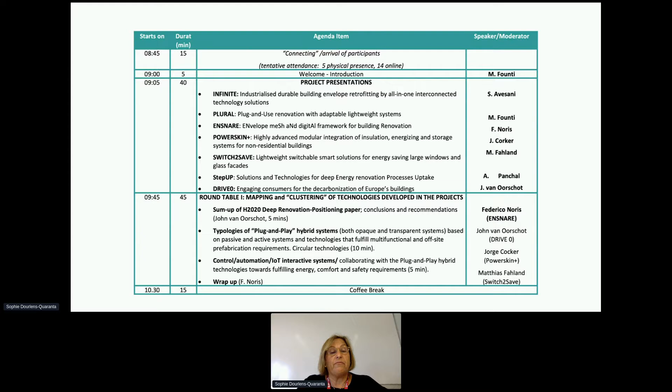The coffee break will follow, and the workshop will close with the second round table that will try to define KPIs, and whether we could, via these KPIs, harmonize the technologies and represent the prefab systems.

So the first presentation will be the Infinite project and will be done by Stefano Avesani, who is not here but will be remote connected.

Okay, Stefano, could you please go on? Okay, so I have to. Yeah, just a moment. So he's online, huh? Yes. Just a moment. So Stefano, please click on share my audio and video.

Do you hear me? Good morning, everyone. Yes. Good morning. Yes, we do hear you. Perfect. So thank you. Thanks for organizing this also in hybrid mode.

I'm happy to share with you the Infinite project status. So as far as I understand, you will share the slide, right? Okay, just a moment. Of course. Yeah, just full screen. Okay.

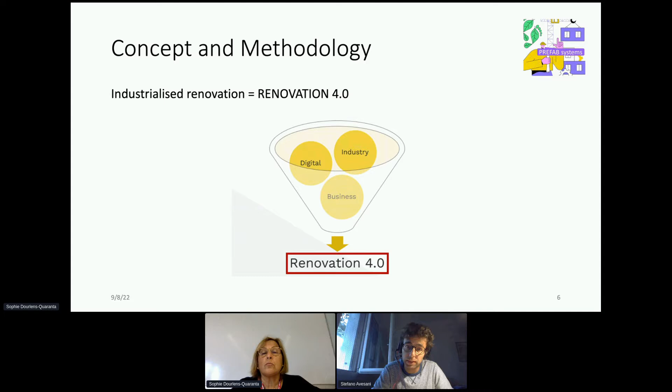And what we propose basically is this, we have called it the renovation 4.0, so merging the topic of industry 4.0, so full industrialized solution supported by digitalization and sound business model. Next slide, please.

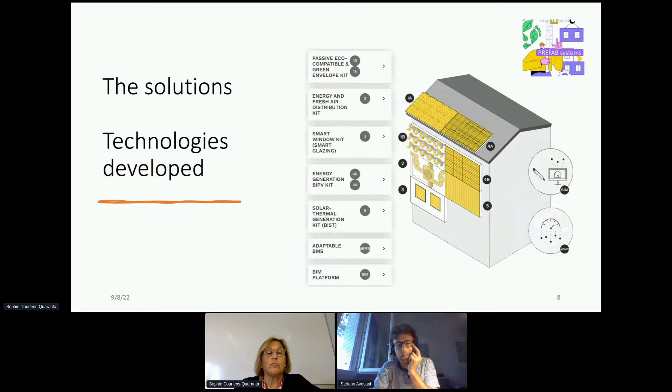In the next slide, actually, you see the concept of having also gray water treatment integrated and a bioelectrochemical system to generate electricity for sensors to be integrated in the envelope.

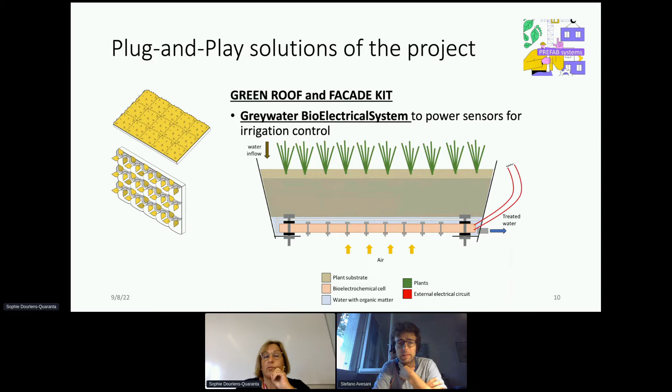The next slides, we go to the second kit, which is basically integrating a semi-decentralized mechanical ventilation unit, but with the plug-in of heating and cooling. So basically, the idea is to distribute heating and emit heating and cooling through this kind of machine. So a very compact heating and cooling system, all integrated in the facade.

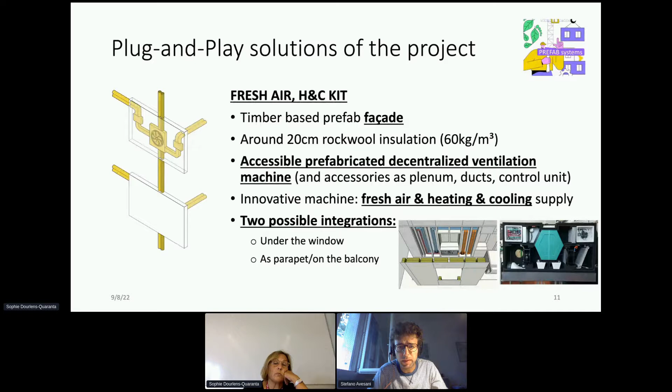In the next slide, you can see our development in terms of smart window. We are focusing on two aspects. One is the sense bar, and this is the second generation of electrochromic glazing for solar radiation management.

The sense bar is basically the sensing part in the window, connected to an intelligent management system. There's a server running real-time simulation to find the best control strategies for glazing or shading.

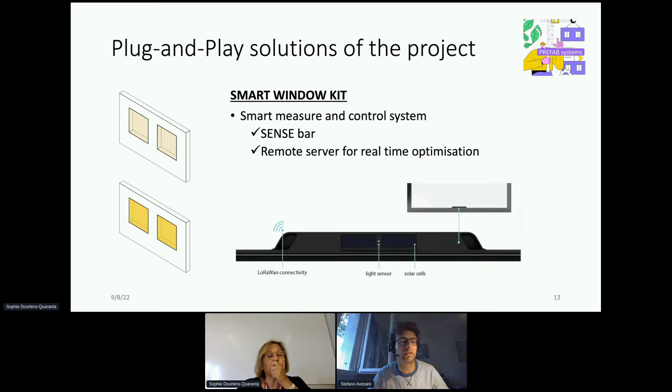The fifth and final industrialized kit is a solar thermal, unglazed facade with a cassette system. It's fully prefabricated and designed to drive the heat pump, increasing overall energy efficiency of heat pump performance. It could also be directly connected to a thermal storage.

All these kits rely on the concept of a prefabricated timber frame, facade, or roof, which is our base common structure for all the kits I've presented up to now.

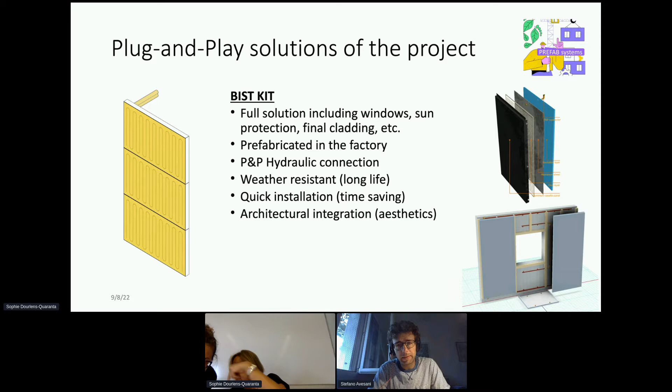I think this is more or less all. The last slide is on challenges. I've tried to summarize what we are trying to face.

Beside the development, there is the cost of deep renovation. Before talking about the cost of industrialized renovation, in our opinion, we have to push to foster deep energy renovation, because the market still works very light.

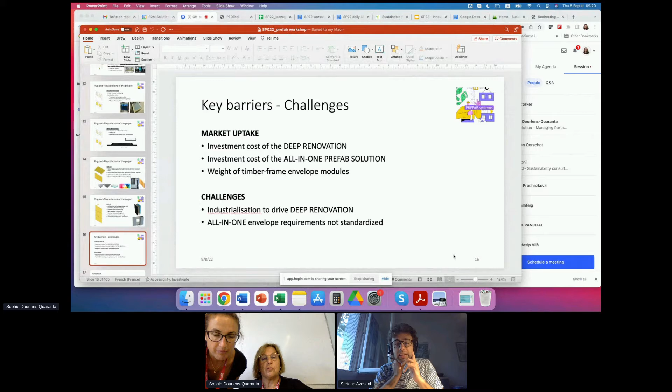The cost of such industrialized solutions in terms of investment is still a challenge, and the weight of the facade might be an issue. To conclude, we think industrialization could really be the key to drive new deep renovations around Europe, and the requirements for these all-in-one envelope systems might need to be more standardized and considered in a norm as well.

I hope you managed to understand my presentation online, and thanks again for your attention, and see you later.

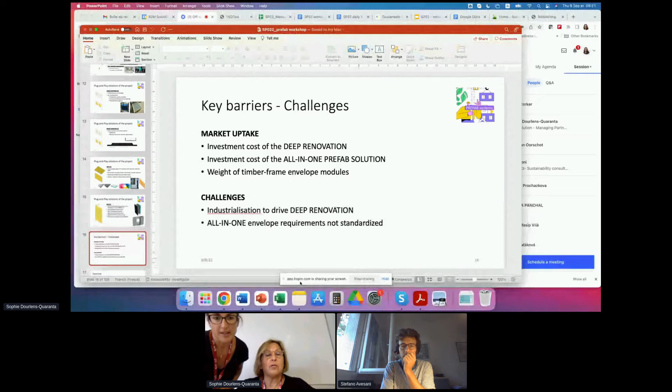I don't hear you anymore, you are muted. Okay, nice. Thank you, Stefano, we could hear you very well. Thank you, now I have to change the presentation. So I can remove Stefano. Yeah, the presentation is over. Thank you, Stefano, you go to the same presentation. Yes.

If it comes... okay, so the next presentation will be from the Plural project, and I will be presenting the developments of the project. It started at the same time as the Infinite project, more or less, because we were all approved under the same call. It's a project that lasts 48 months, and we have 18 partners from 5 countries.

The aim of Plural is to develop, design, validate, and demonstrate a palette of fully prefabricated off-site plug and play kits, which take into account user requirements, which is why we call them PnU kits. These kits integrate different components, aiming to reach NZEB status of the renovated building, demonstrating cost effectiveness and time savings as a result of prefabrication.

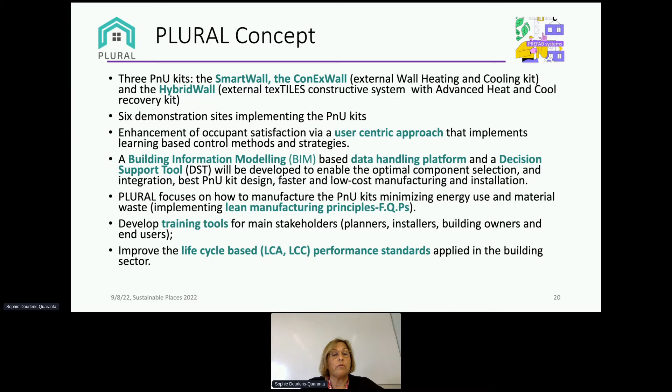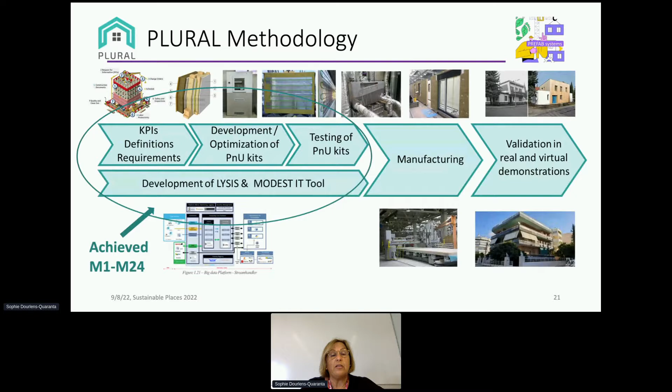We are implementing lean manufacturing principles, and training tools are also developed as part of the project. The project evolves in phases from the design to the manufacturing and validation. Here is a presentation of the three basic PnU kits.

The first one is a smart wall. It's a fully integrated, flexible, prefabricated facade, which can be installed at the exterior or the interior of the building. It integrates a control system for the fan coil, linking its monitoring to the interior building requirements, plus smart windows that integrate energy harvesting and mechanical ventilation. It is already being demonstrated at the prototype level at this stage.

The second PnU kit we are developing as part of the Plural project is the ConExWall PnU, which is based on the technology of one of the project partners, folding facade systems. The kit is extended to include air handling units, smart windows, and control systems for monitoring indoor air quality and thermal comfort in the building where it will be integrated.

The third PnU kit of the Plural project is a hybrid wall. It's a hydronic system that has been previously developed, but not at the prefabricated stage. In the frame of the project, it is integrated into wood facade components, driven by a heat pump, and includes a control system and a smart window.

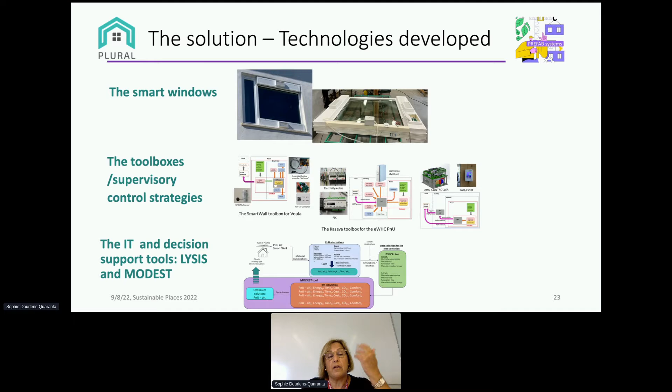The so-called toolboxes are the control systems that couple the operation of the prefabricated kit with the building monitoring. The data is stored in a large database, which is linked to the BIM simulation tools and the LCA tools. We are also developing decision support tools to prioritize and give hierarchy according to different scenarios for the designers.

The Plural PnU kits will be demonstrated in three real buildings in different climatic conditions, since each of the PnU kits is designed to meet the requirements of specific weather conditions and building typologies.

The smart wall will be demonstrated at a building in Greece, shown on the left of the slide. The hybrid wall will be demonstrated at a building in the vicinity of Barcelona, in Terrassa. The ConExWall will be demonstrated at a building in the Czech Republic, where the climatic conditions are more appropriate for this typology of prefabricated kit.

In addition, the external wall heating and cooling system that will actually be installed in the Czech Republic will also be virtually installed, meaning we will follow all the design and validation procedures at a building in Bern.

The smart wall will be modified and demonstrated in a building in Berlin, which has been recently renovated, so we will have the capability of cross-checking whether we can reach NZEB conditions with this typology of prefabricated kits.

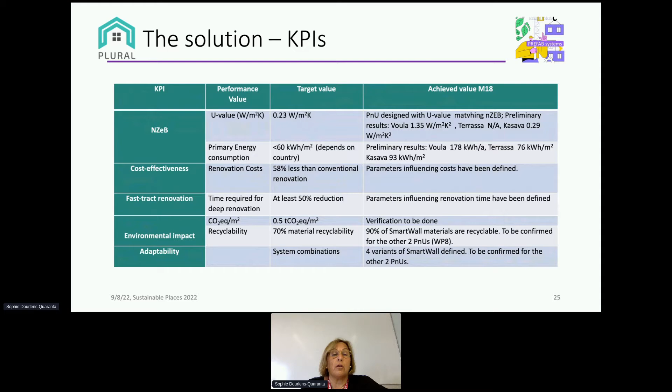These KPIs refer to the NZEB status, such as the U value of the PnU kits, cost effectiveness, fast track renovation, environmental impact, and adaptability. These are continuously monitored and improved during the stage of the project.

Now, closing the presentation, the challenges we currently face are linked to the current economic and energy situation in Europe. Increases in energy and fuel prices affect the production capabilities of the manufacturers, and may eventually affect the production costs of the PnU kits.

A consequence of this is the shortage in raw materials and high-tech components, chemical compounds, delays in delivery, and significant increases in prices, which are currently being handled by the Plural manufacturers, but we don't know how things will evolve. This might also lead to a lack of interest in this type of solution due to the unstable economic situation in Europe.

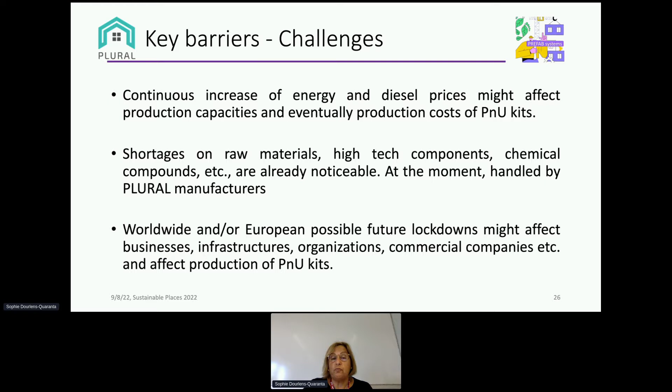Anisha, are there some questions? Yes, there's a question for Stefano. Yes, please. But I cannot see the question from here, can you read it? So please sit down. But then it means we have to give the floor to Stefano so he can answer. So Stefano, there's a question for you that will be read, and in order to answer, click again on share audio and video. Yes, please.

Hey Sophie, I don't hear you. You are muted. Sorry. Hi, can you hear me now? Yes, please.

Okay, so Natalie is asking, how easy is it to apply your solution to other buildings? Because each building is different. So when you're working with a facade, how do you make sure it can be used with a variety of buildings?

Okay, thanks for the question. So the base structure is a timber frame, which is modular on a more or less 60 centimeter wide system, and so basically it is scalable in height or width quite easily. And then we are developing mainly a ventilated facade, which again could be easily modulated in different sizes. But of course, the solution could also be thought of as prefabricated with the finishing, and again, there are not particularly constraints on the size of the modules.

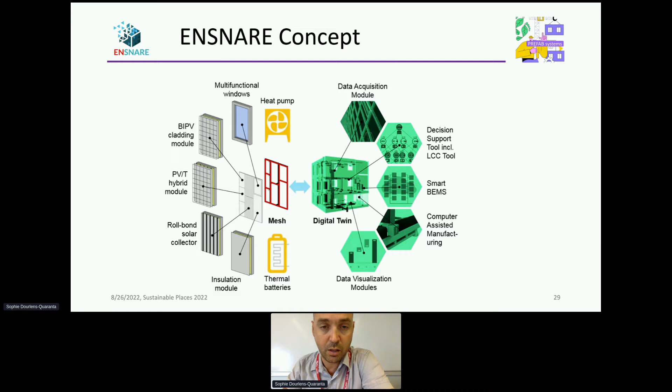And then we have a great focus on digital twins and digital tools that, as I mentioned before, can support different things. For the building components, everything is based on an industrialized, prefabricated, modular facade panel that is somehow standardized. It has some degree of flexibility.

As was also related to the question before, there is a challenge with the complexity, but for a lot of geometry it can be applied and customized to the need of the specific application.

Here we can integrate different renewable energy technologies, both for electricity generation, so BIPV, and also hot water via solar thermal. We're also developing lower TRL PVT technologies that generate both.

We also had the ambition, but it's lower TRL and farther behind in the development journey, for a heat pump coupled with PCM, as well as smart windows.

Similar to the other projects, we had a great focus on digital platforms. So we are developing a renovation supporting platform that is subdivided into different modules.

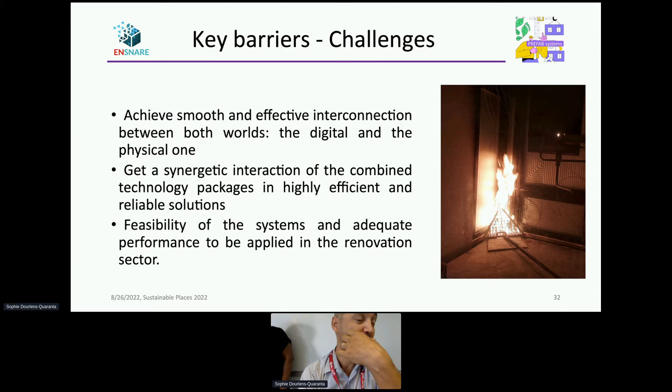Yes, what we're trying to prove is actually that it is suitable for a number of buildings, including residential and commercial. The aim of this project is to make renovation more sustainable and more approachable for larger types of buildings, including commercial and residential. What we want to achieve in the end is that even residential buildings can afford this service.

These projects focus mainly on residential, so you might see a lot of attention and keywords focusing on residential, but the solutions have often been deployed into the market mainly on commercial buildings, especially these digital tools. So the goal is to apply to both.

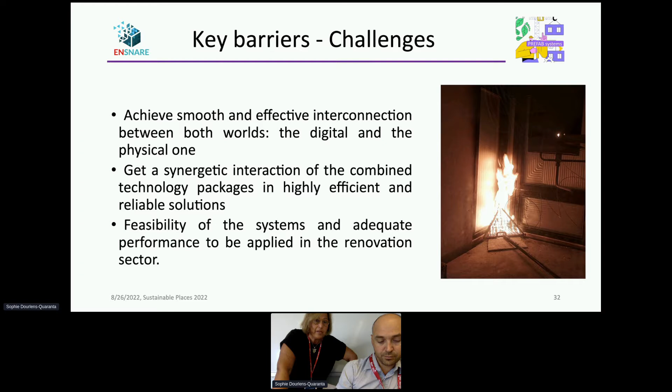May I add something to this interesting discussion? When you try to implement BIM and digital twins at residential buildings, at this level of research you're actually solving a lot of technical problems related to the implementation of BIM. The creation, for instance, of dedicated IFC files for these prefabricated components is a challenge by itself, because they are not commercial components, they are systems and kits that integrate a lot of different components, and it takes a lot of effort to develop the methodology for how you develop the IFC files.

Also, the implementation of BIM for the design and coupling with the prefabricated facade components is also not trivial, and I believe it is solved via this research project. So I see an added value, even if it is not cost effective for widespread use at the moment, because we are developing new approaches and methodologies in these projects, which may find marketplace use in the future.

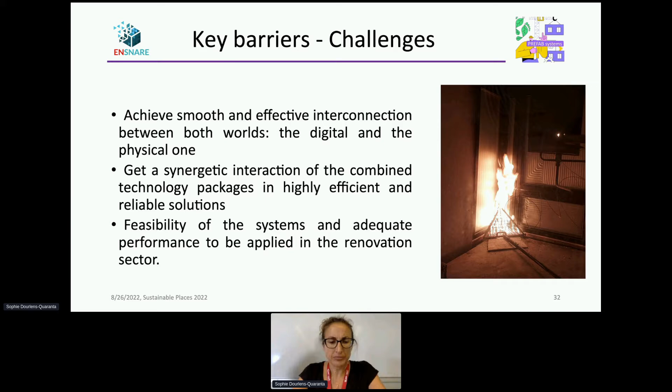Hi Sophie, can you hear me? Yes, we can hear you very well. Just a moment, we'll mute ourselves. Can I share my screen? Will you share? Yes, sure. I will try - can you see? No, okay, you may just open all your windows on the same screen and share your whole screen. But we can use our presentation - in case, we have a backup presentation for you, Jorge, because it has some animation, so I will need you to click on those. Okay, we will do so. Okay, so please go ahead. So we just mute ourselves.

Good morning, everybody. I'm the coordinator of PowerSkin Plus. This project was funded on the previous call, the energy efficiency call of 2019 - the integration of energy smart materials in non-residential buildings. So it will sound a little different from the previous projects. We have 14 partners integrating different types of research entities and companies.

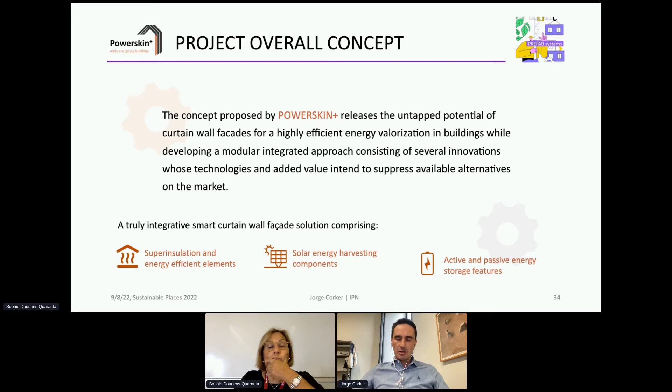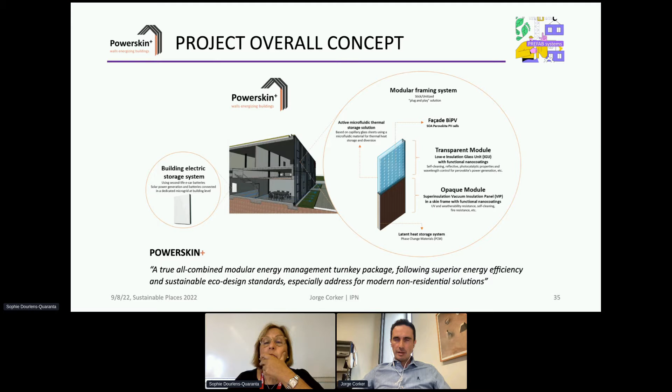Here's a glimpse of the schematics of the different types of modules - some people call them kits, we call them modules of the PowerSkin proposal and concept. What we are aiming for is a truly combined modular energy management package that can achieve superior energy efficiency and sustainable eco-design standards, specially addressed for non-residential solutions.

The key objectives of the project: we are trying to generate hybrid-enabled systems with different multifunctional add-ons, different features that we are proposing for NZEB and Plus Energy building curtain wall solutions. The aim of our project is to demonstrate this holistic facade solution in an operational environment. We will end the 4-year project at TRL 7, but we are aiming for future commercialization of our different solutions, targeting new buildings but also providing the retrofit market with our energy efficient management systems.

I will not go too deep on the methodology of the project, but just to tell you that we are tackling a number of key enabling technologies, and we are trying to pilot them in an operational program. We are talking about super insulation elements, nano-enabled coatings, active and passive PCM-driven latent storage elements, and an innovative microfluidic thermal storage system.

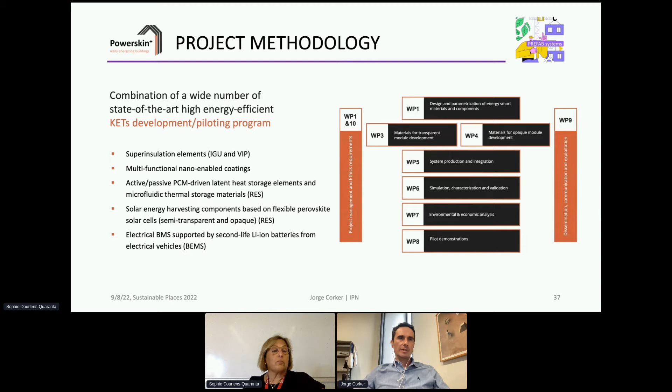We are working on solar energy harvesting components based on flexible inkjet perovskite solar cells, either being semi-transparent and opaque, and finalizing with an electrical building management system supported by, we are aiming for, second life lithium-ion batteries from used electrical vehicles.

Next slide, please. So here I've got a small animation that I will ask Maria to assist me with clicking on, just to tell you more or less what we are addressing in the different modules. So we divided the transparent modules and the opaque modules.

In a cost-effective standard option, we start with a common triple glazed insulation glass unit, an IGU, that can be harbored either in a modular framing system, being a stick or a unitized system. We are trying to make it simple and more adaptive to different types of framing solutions. And in a premium option, we start adding some add-ons, some extra features for enhanced performance.

So go ahead, Maria. We start with functional nano coatings that for this IGU system can be providing properties such as self-cleaning, anti-reflective, photocatalytic properties, wavelength control for the perovskite's power generation.

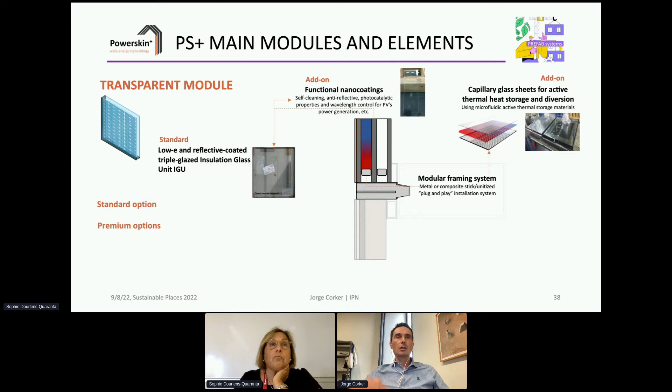Next, Maria. We have this innovative add-on that is based on a capillary glass sheet for active thermal heat storage and diversion. So we use a microfluid inside these very thin channels and we pump this microfluid along the facade in order to remove heat and combine this with a heat pump.

Next slide. For the transparent modules, we are working with flexible perovskite semi-transparent solar cells for the energy harvesting solution. And we finalize this by combining it with the electric storage system, which we intend to be an autonomous storage system using these reused batteries. But also we are intending for this system to be also connected to the grid.

Just to give you some examples of the different prototypes that we've been developing in these 3 years of the project, you can see the IGUs that we are developing. In the middle, you see our prototypes. They are currently being tested of the microfluidic heat storage system.

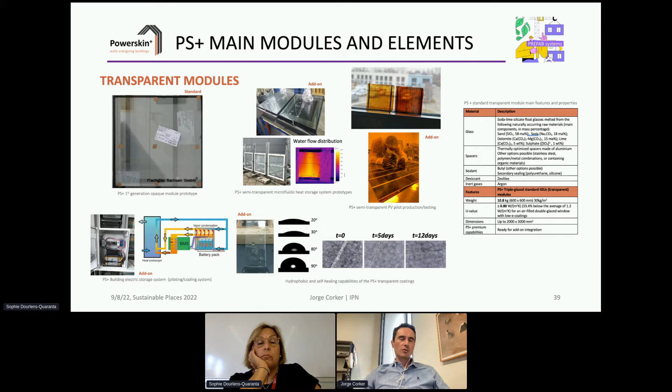You can see also some semi-transparent PV cells that are being developed by one of our partners. You can see some examples of the different nano coatings being developed for the transparent modules, and also schematics of the building electric management system, the battery system.

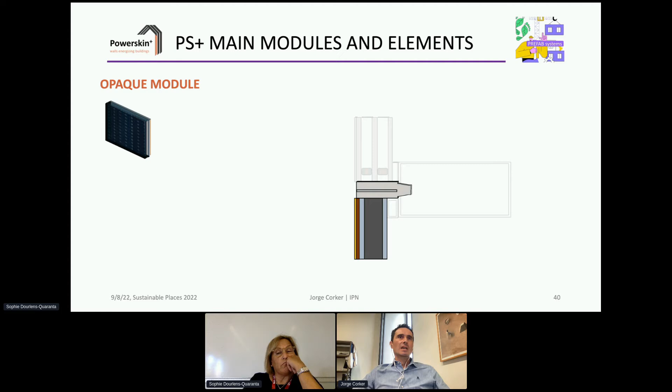The opaque module starts with the standard solution. Go ahead, Maria. It starts with a simple module that can be composed of skin panels of glass, composite, or even metal, and in between a super insulation model that we are working exclusively with vacuum insulated panels, so to give enhanced performance in terms of insulation.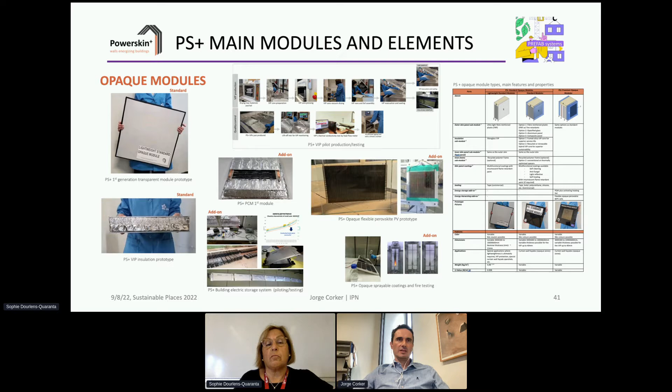Next slide, please. So we will have 3 pilots running quite soon. Actually, we are on the verge of starting this installation in 3 different locations: here in Coimbra, Portugal, one in Germany, and the other one in the Czech Republic. It will be 3 different types of buildings in 2 different types of climates, and we will try to prototype in these 3 pilots the different solutions that we are working on in the project.

The buildings are very different from each other, so we are trying to demonstrate how adaptable these models are to different types of buildings. Next slide, please. This is an example of the building here at IPN that will harbor some of the modules we have been developing in the project, and this installation will start quite soon in October.

So basically, just to give you a timeline to results. We are, as I told you, starting to make the installations. We are running some pilots in outdoor test cells in one of our partners' premises in Italy. We are already monitoring our solutions, and hopefully by the end of 2023 we will have our solutions completely tested in pilot, with the full documentation of our developments so far.

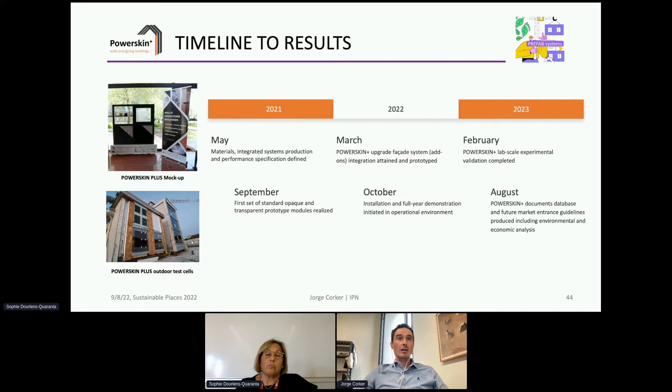It's different to work with new buildings and retrofit solutions when talking about modularity, but we can speak a bit more about this later on. Obviously, the technical barrier of highly diverse building and facade types makes it difficult to design universal and easily adaptable retrofit solutions, as I told you.

There are also other challenges in terms of standardized solutions capable of fulfilling different requirements in different countries and regions, and obviously some bottlenecks still preventing further industrial uptake of some of these high-priced solutions, especially the ones derived from nanomaterials.

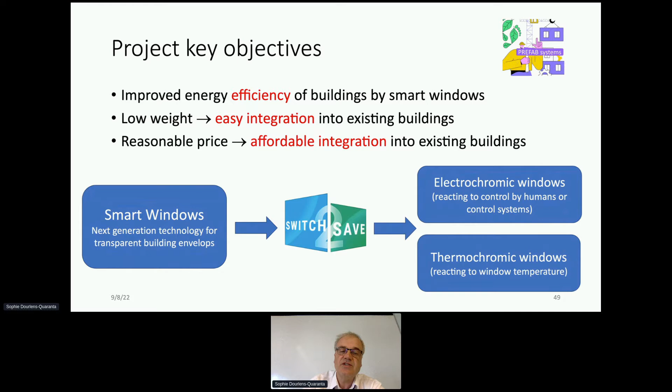So this is an overview about the concept and methodology. We have altogether 4 phases in this 3-year project, which is quite challenging from the timeline perspective.

We started with some material development. I really want to emphasize some in this case. Of course, these materials had already been in research for a longer time. Nevertheless, for our purposes, it was necessary to do some adaptations.

But then the research and the efforts very quickly shifted to developing and optimizing the technology to bring this really into the area in order to follow up the objectives which I have shown. We want to make it affordable and want to demonstrate it in reasonable dimensions.

In the third step, we integrated these flexible and lightweight pre-components into really building components. We want to build IGUs, to prefabricate glass sheets with laminated thermochromic or electrochromic components. And we want to develop these building elements to a stage that they can really be used in a plug-and-play manner for building integration.

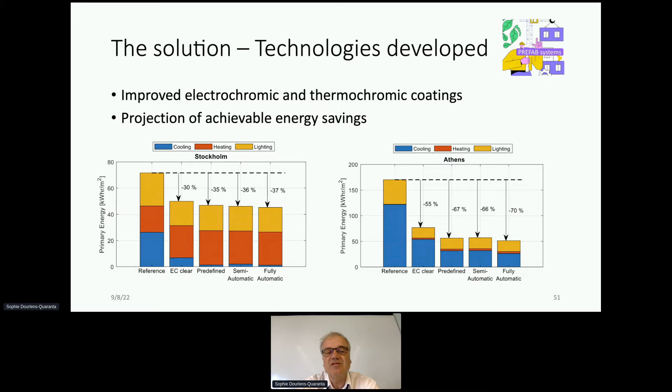The demonstration in the real buildings, that's still an outstanding work package in this project, and of course I cannot yet present it here in this conference today.

So these are the plug-and-play solutions as we have it. On the left-hand side, the electrochromic window. You see an IGU in a size of more than 4 square meters. This IGU has a roll of electrochromic material implemented, and it's ready for installation, as you see it here in the facilities of one of the project partners.

It's more than 4 square meters, which is already a reasonable size for really demonstrating that this is something which can easily be integrated into buildings. On the right-hand side, you see a roll of thermochromic thin film glass.

As you might already guess, the TRL level of this solution is a little lower than for the electrochromic. But nevertheless, also for this material, we will integrate it into windows and present solutions which provide measurement results at the end of the project.

These are in order to have a proof of the gain of efficiency in the buildings. We really have the concept to test, in the last year remaining for the project, as many configurations as possible in order to find out what's the best solution.

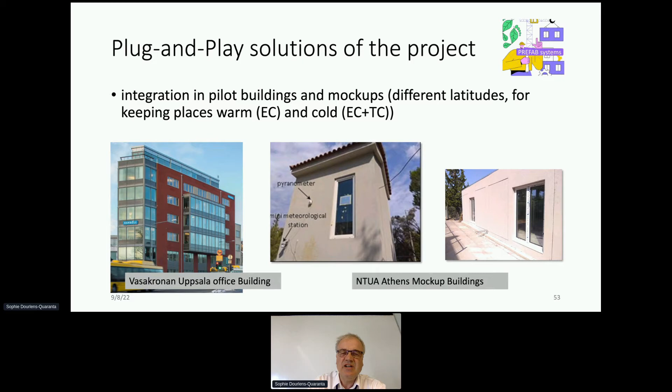And this demonstration, what we have already shown, is that within the partners of Switch to Save, we are capable of really manufacturing this in an efficient way, achieving pretty large components. And this puts us in a situation where we can really bring this to a wide market.

An important part of the dissemination strategy of this project is that in the last phase, which is now going on, we have implemented a design contest, open for architectural students. This design contest is really giving the opportunity to play with components, to see how they can be integrated into new architectural concepts, how the energy efficiency potential of these components can be used in the best possible way.

This design contest is open until next March, and I hope that we can encourage as many architectural students as possible to take part in this competition. I also need to say we are very open to seeing these solutions and bringing in these ideas for projects.

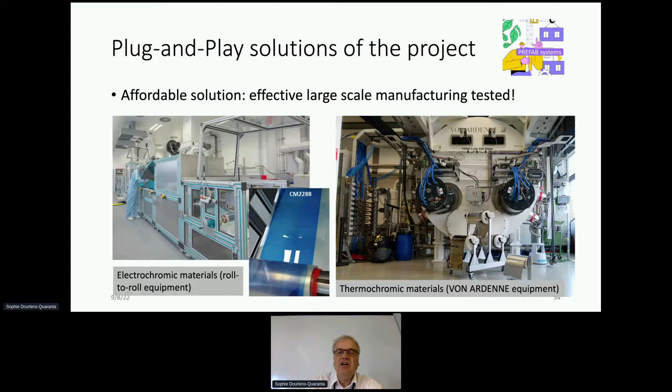Let me round up with the key challenges or key barriers which we see. Already within the project, but probably also in the time after, we have at the moment problems with manufacturing costs and also with installation costs. I think that's something everybody sees in daily life, very common in the present situation.

Apart from this, I want to emphasize another point which I, from my experience, meet quite often when it comes to projects in the architectural area. Here we are very often facing lifetime expectations which are in many years or even can be counted in decades. That's, of course, always difficult if you develop something new, especially on the material basis, to give such guarantees from the spot. That's nearly impossible.

That's why I think it's very important, also from the perspective of the European Commission, to have such a pilot market in which you can demonstrate new solutions without having these constraints or requirements with full seriousness. Let's take it like this.

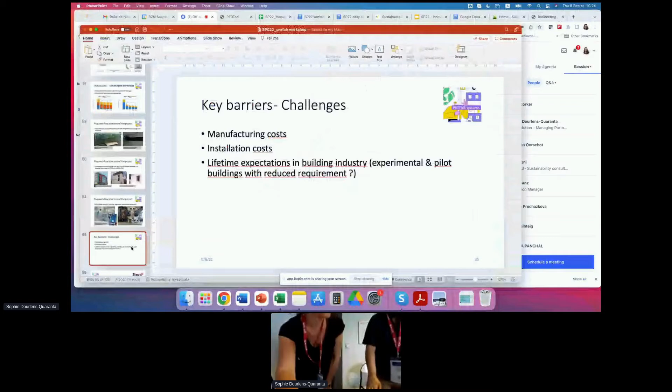So it's your turn now. Yes, Amisha is doing everything. She's moderating, she's answering.

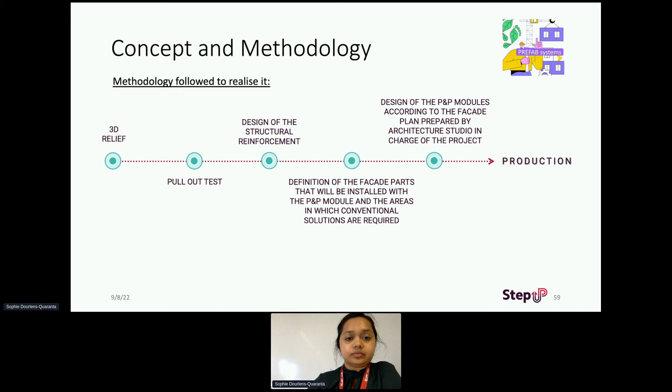So this P&P technology is supposed to be modular, and it's a plug-and-play system. One thing we consider really important is monitoring the performance as it operates, to see it's performing as we expect. It is assembled off-site and highly customized, and of course it is aimed at improving the energy performance of the buildings.

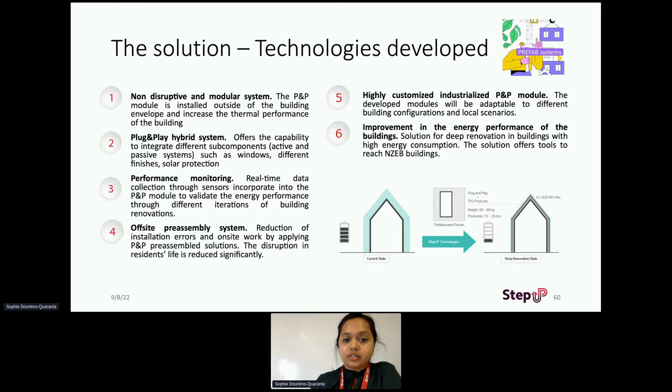I'll go on a high level of what this plug and play facade consists of. We have an anchor system on which we have a galvanized steel structure, followed by the sandwich panel made of mineral wool or polyurethane. The windows are installed after this, as well as the protection elements, brackets and profiles on which the final facade panel is laid.

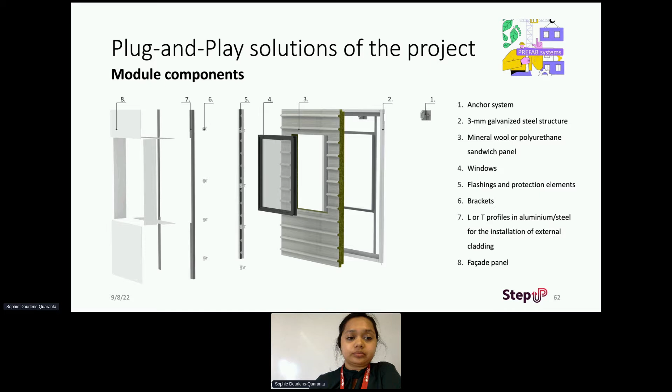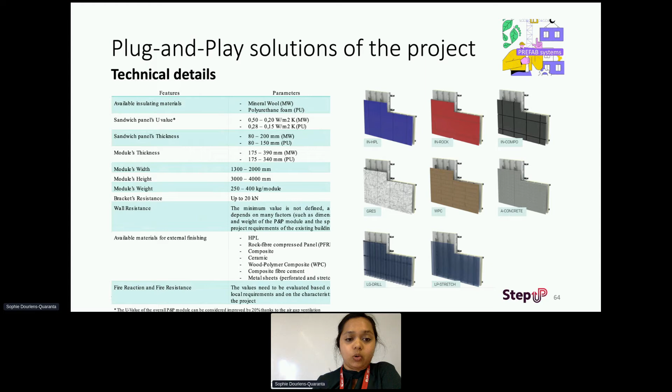There are different module types to address the variety of facades we may encounter in buildings, and it can adapt to different window sizes where necessary. One important thing when addressing the renovation market is to be flexible, and the plug-and-play technology does that with various insulation materials, sizes that make it easy to transport, and different external finishings.

Another key element I mentioned before is integrating third-party technology, which we call the third-party cluster. This could be passive technologies as well as active and monitoring technologies. Passive could be sun shading equipment or high-performance windows, and active systems could be demand control ventilation, heating and cooling systems, and PV systems.

However, so far we have only managed to integrate Gradhermetic blinds. This also reflects the fact that, like all research projects, we have faced issues due to COVID and the increase in raw material costs, which has complicated how we approach a number of things in the project, including the TPC integration. This is something we would like to do more in future.

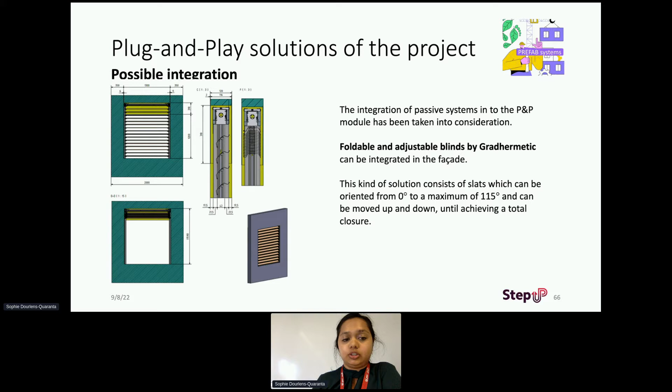The installation sequence is: first we position and install the plug-and-play modules on the existing facade, followed by positioning the jolly modules and fixing them to complete the facade. I will show a video to demonstrate the installation.

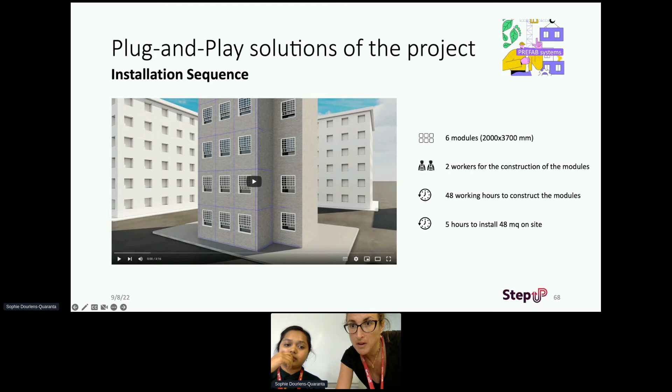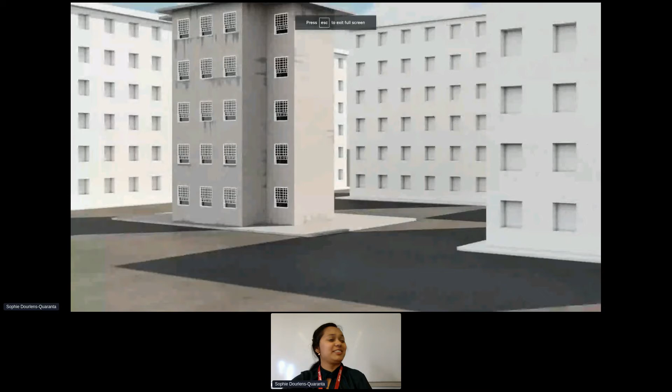Yes, okay, so you can see here an existing building, and firstly the anchor system will be installed on which everything else goes.

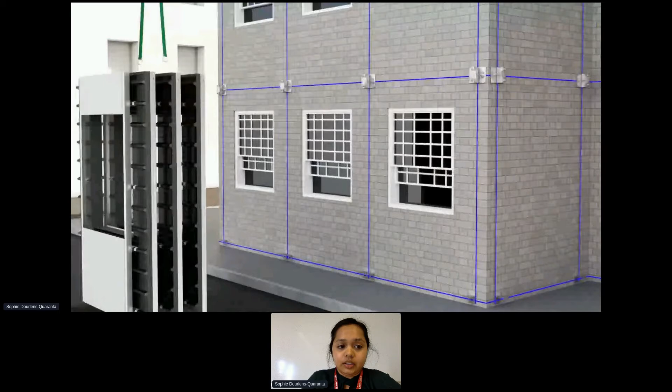I'll fast forward this because I'm aware we are low on time. Then we have the pre-assembled facades being shipped. The sizes of these facades are adapted so that they are easy to install and easy to transport to different sites. And this is the mineral wool insulation.

I didn't remember there was music.

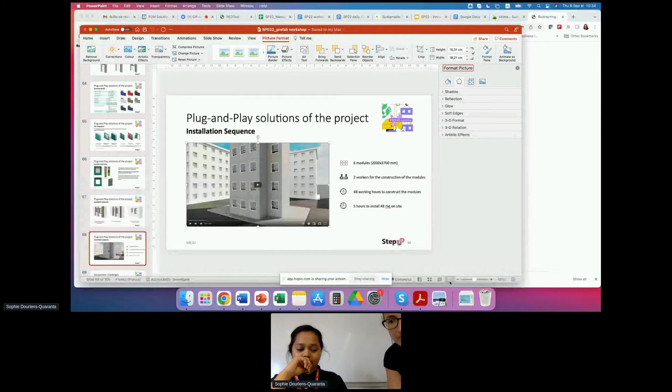That was a quick video of the installation sequence.

To summarize, the key barriers we're facing, similar to all research projects right now, include an increase in the cost of materials, exacerbated by the fact that because this technology is quite new, there is some hesitation from installers and contractors on how to approach this. This is expected, and we believe that installing this in a real case pilot will help in that validation, as well as being able to monitor the energy performance before installation, after installation, and continued performance monitoring, which will also validate these key barriers.

Another issue we have faced is that we are not able to integrate as many third-party products so far, but we are aiming to do that as we go along. So thank you very much, that was a quick summary.

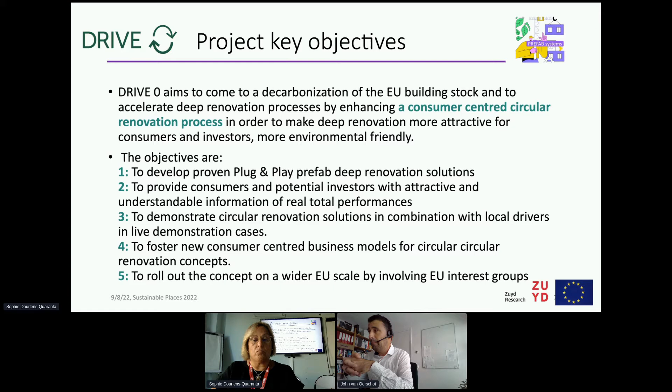So this is not what we see as a user-centered approach, because the neighbors here are also stakeholders in the project. So metaphorically, is this the way ahead to renovate the building stock? In the Drive Zero project, we don't think that is the way to go, and that we could do this better.

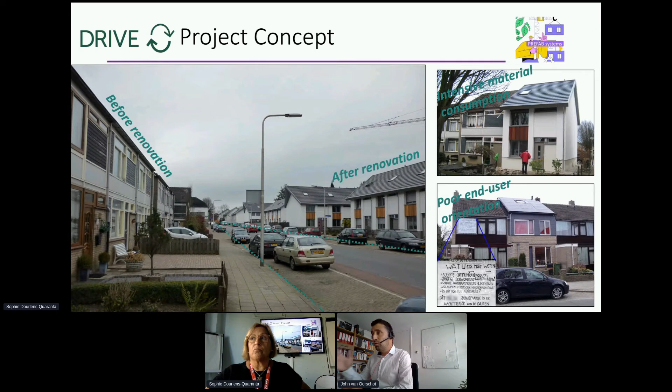This is really what drives our developments - it's in the name, what's driving our work. Our approach is not ordered 1, 2, 3, 4, but it's really complementary.

We are developing technologies, plug and play deep renovation solutions, but they are at least circular. That's the technological development part, but it's complemented with really consumer-centered approaches, and also involving and informing occupants about the performances after the deep renovation.

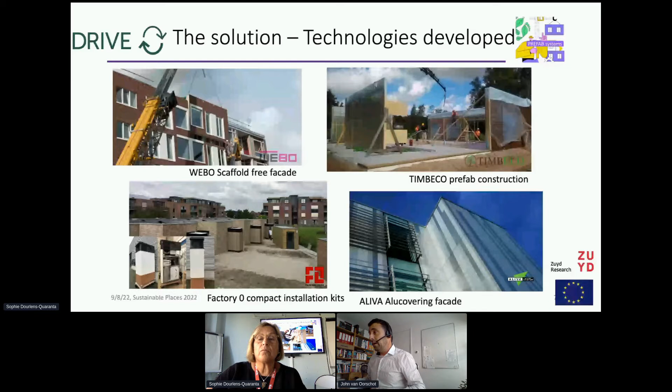In our consortium, we have some partners - we have really experienced technology developers who are already in the market, offering modular plug and play technologies, and now we're trying to make them more circular, consumer oriented, and fit into holistic deep renovation concepts.

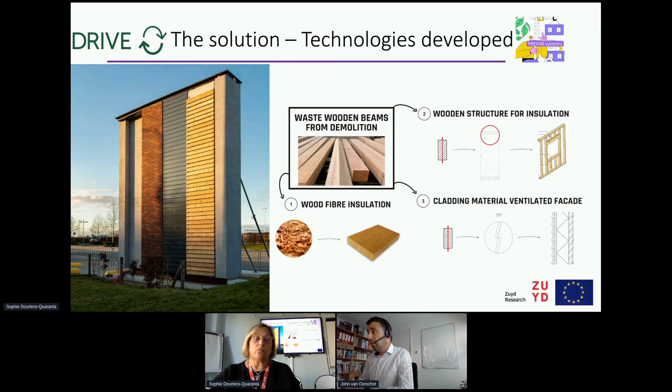This is an example of what we have developed, and before we go to the demonstrator project, we also work with test beds. Here's an example from the Netherlands, on which I might work myself, where we developed various facade modules which differentiate in the level of circularity. In our approach, the most circular solution is that we harvested materials from demolition sites, and used the materials to renovate nearby housing units.

Besides that, we developed plug-and-play 2D facade modules. We are also developing other technologies to come to a holistic renovation kit. We have also developed prefabricated 3D extensions, also with circularity principles. What we also offer is compact building service kits - they can be put on the roof, in front of, or in the back of the property, and they need to be integrated also in a circular way, so it's also important to look at the interfaces, which we are working on in our projects.

What I want to showcase here is that it's not only important to...

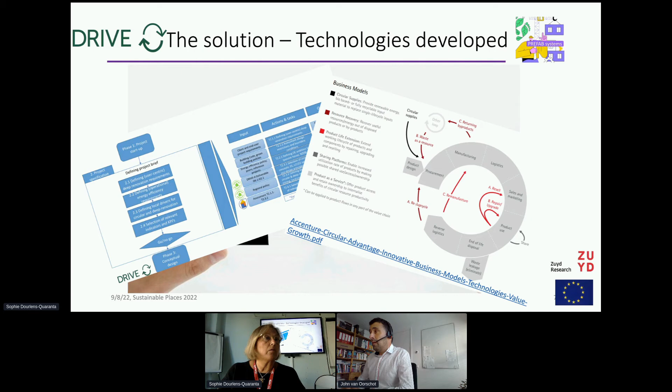It's not only necessary to develop the technologies, but also the complementary processes, supply chain setup, and business models. So we have a set of complementary innovations supporting the uptake of the technologies, which are of course key in our project.

It's already my final slide, so I'll try to be brief since we're a little behind time. Some key barriers we are facing are legal and regulatory barriers, but also lack of trust and interest in deep renovation technologies. For that, it's really important to have a user-centered approach and look at local drivers.

To really make this transition occur, there are of course some challenges. We have some financial, legal, and operational risks we need to cover, and for that we also need those complementary innovations I was referring to.

The last challenge, typical to our project but I believe occurring in all the projects we've seen in the last hour, is that when we started, the market prices of virgin materials were quite low, including gas and oil. But this has changed in the last couple of months, so this challenge is not really bothering us at this point.

Some of the barriers we faced were also input for the workshop we did during the Sustainable Places Conference last year. We had an interesting workshop with six deep renovation projects, and this resulted in a positioning paper, which I will discuss later in our workshop.

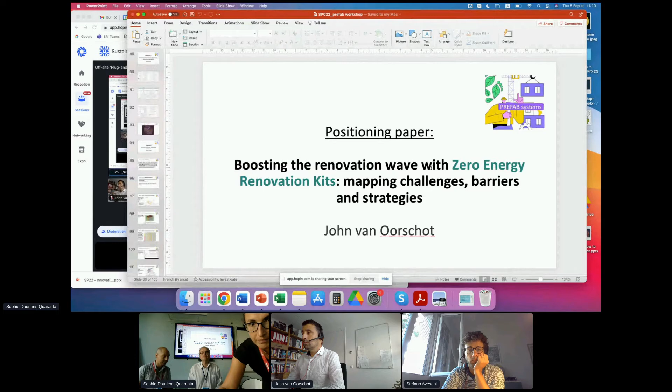John, can you hear us? I can hear you very clearly. Okay, so please go on. Yeah, thank you again.

The positioning paper - what's the background of this? Why did we actually do this in the first place? During the work in the Drive Zero project, we faced some barriers and challenges we could not solve on our own. These were macroeconomic or even institutional, and we were curious whether this was only us experiencing this, or whether there's a broader presence of these barriers and challenges. So we were curious how other projects cope with this. Because of this curiosity, we initiated a workshop last year, and after the workshop we decided to come up with a positioning paper, which discusses all the barriers and challenges we identified during that workshop.

We use a more holistic definition of zero energy renovation kits for all deep renovation solutions developed in the project, which is also found in various EU policy documents. Zero renovation kits are defined as integrated solutions which include various technologies, with the aim to arrive at net zero energy consuming buildings. What is typical of all these technologies integrated in the deep renovation kits is that they are characterized by a one-to-one mapping between functions and physical subsystems. For example, if you want to reduce energy loss through the facade, you can install facade panels to perform this task. That's how we defined energy renovation kits.

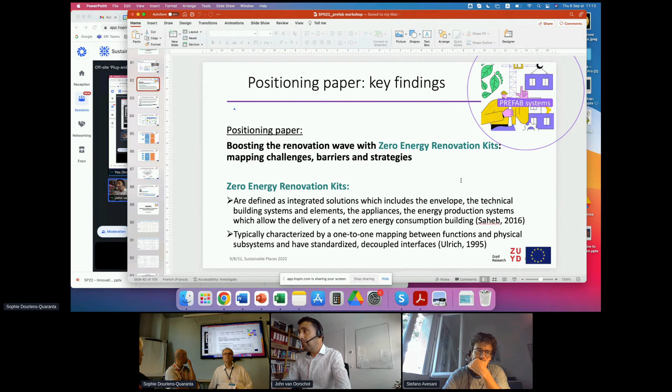What we experienced in general - it's already been in debate for a decade, I believe - is that there are so many innovations, but they are poorly adopted. So what are the challenges and barriers we need to overcome to increase adoption rates at a larger scale? We're interested in the technical, market-based, financial, legal, and institutional barriers which hinder the uptake of modular and industrial energy renovation kits. And we don't want to stop there - we also want to think about the strategies to overcome these challenges and barriers.

So how did we do that? Briefly discussing the methodology: we invited 6 EU projects and some key stakeholders participating in this project. We developed workshops and applied a Miro board, an online whiteboard, to collect all the input for the barriers and strategies to overcome these barriers. That's what we basically did last year during the workshop - a very interactive session, very intense, with nice and interesting insights.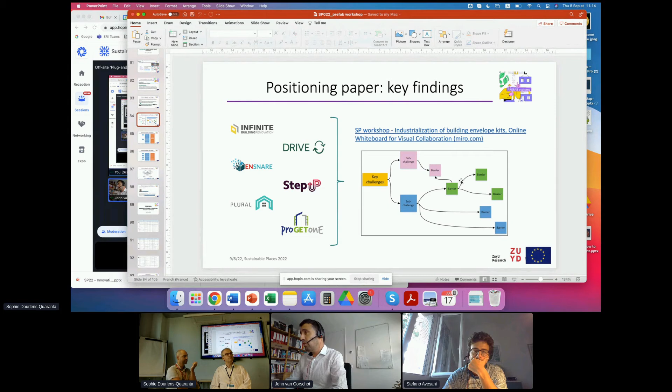So what were the key results? This is the end result - we developed various frameworks to collect all these barriers and strategies, and also to order them in time. I invite you to have a look at the positioning paper, which will become officially available very shortly after this session. We developed a coherent model, presented now on screen. I see it's not in presentation mode, so it may not be very clear to read, because it's a screen within a screen.

In the blue column, we ordered all the barriers and challenges we identified, and we categorized them. Also shown on screen is that we collected all the intervention strategies we identified to overcome the barriers found. As you can see, and as you can expect, sometimes one intervention can solve several barriers, but sometimes it's the opposite - sometimes you need various interventions to overcome just one barrier.

Going a little deeper, but not too much detail - one of the key barriers is institutional lock-in. There are regulatory issues we need to overcome before some technologies can be adopted in deep renovation projects. At the same time, we have project context limitations that make it very hard to implement the deep renovation solutions we are developing in our projects.

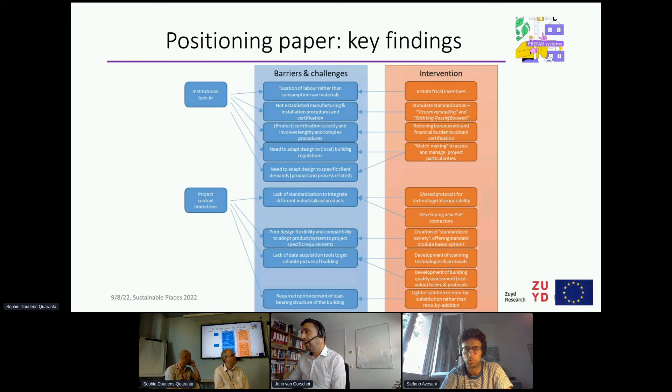You are offering new innovative solutions and how to build trust. So how you can cope with these liability issues is also something you need to think about before you can go to the market. It's also about building trust.

And because it's new, it's innovative, you also have to think about the readiness of the technology. So there we identified various technology readiness barriers. Of course, in time this will be resolved, but you can really steer on that. Linked to that, there are some skills and knowledge issues because it's relatively new. You need to train new skills. You have to share knowledge about how to operate these technologies before they will be really fruitful in arriving at a circular and energy efficient built environment.

So this is actually the model we developed after the workshop. Well, I'm coming to the end of my presentation. One of the key issues is that after going through all the barriers and also the strategies to overcome these barriers, when we look at the overarching model we developed, we found out it really depends not only on developing the technology itself, the products.

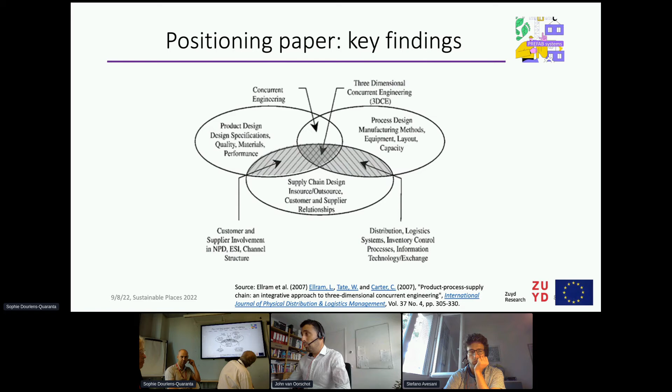So this is one of our key findings and also implications we'd like to share after this workshop. I was very brief. I really invite you to go over the positioning paper, and for now I think this is a good start for further discussion.

Thank you. Thank you very much, John.

I don't know whether there are any questions from the audience. If not, we will... Any questions? No. Okay, so let's move on to the core of the first round table.

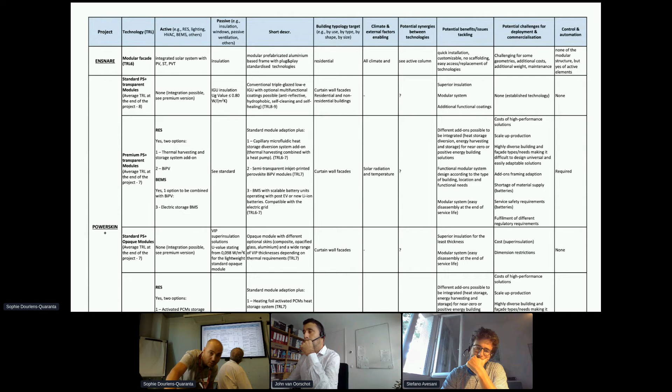Federico has prepared a very short presentation overviewing the background work that has been done as part of the preparation of the discussion. Would you like to say something, to present a little bit what it is in here? So, please go. Okay, I don't know, is it okay for you now? Stefano?

As all the participating projects know, I've asked them to complete this matrix where we try to map and characterize the technologies that each project is developing. There are some similarities, as we discussed previously. Maybe very briefly, each project can describe in like 1 minute what each technology is, and then we can start brainstorming about how potential synergies or collaboration opportunities between the technologies resulting from the different projects can be imagined.

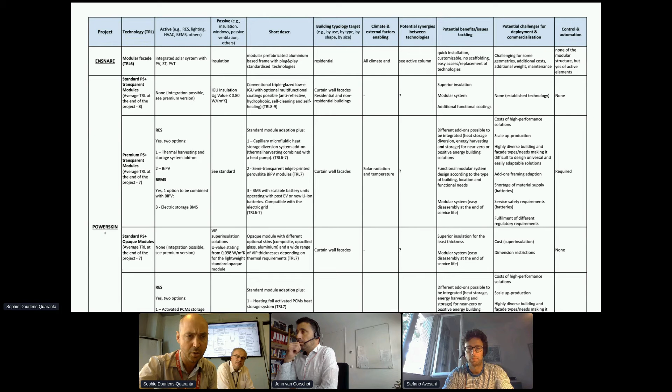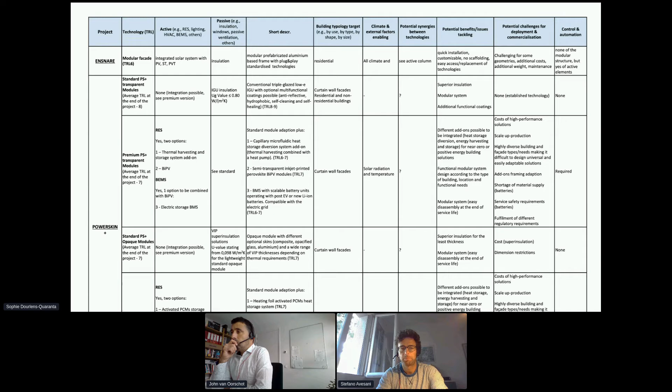This first slide is actually cut off, so maybe I leave presentation mode, because otherwise the POWERSKIN+ technologies will not be shown because it's actually longer - I couldn't fit it in. But I will start. So, the main technology that we are developing, as I mentioned earlier, for the facade is this modular prefabricated plug and play facade that can integrate different things.

So, active solutions, different kinds of renewable energy sources. For passive, we have insulation with phase changing material. And as I mentioned before, it's based on an aluminum framework. The focus is on residential, but it does not preclude applying it to other typologies. It doesn't have a specific climate requirement, although it doesn't have a lot of thermal mass because it's aluminum based.

And then, we are already with this product - when I filled in this table, I already clustered different technologies because the modular facade also includes all the renewable energy sources that we can have. As a benefit, you know, the quick installation - you don't need the scaffolding. You have easy access to technologies that are integrated into the modular system for maintenance or repair.

As the challenges, as I mentioned earlier, for complex geometries, you have some customization opportunities, but if you have curved surfaces or curved envelopes, it's not so easy. You have additional weight on the facade, and then you have to make sure that the elements are maintained by the maintenance staff. The facade per se is not controlled and automated, although some of the elements that are included are. Okay, maybe we can do the same thing for each of the different projects very quickly.

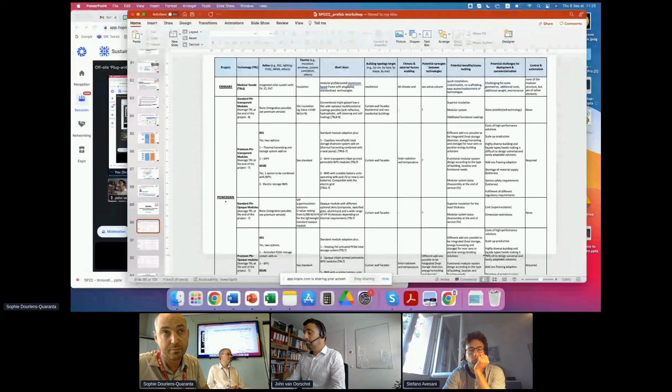First of all, thank you very much. I was saying that it is the first time we managed to collect the technical information about the developments done under each project, and I find this table very useful. I think due to time limitations it will not be advisable to go through each of the projects. On behalf of everybody who has contributed, I would like to thank them for the very fast response. What I think we should discuss now, based on the input received and the titles on the top, on the horizontal level, is whether it's possible to cluster, to put together common criteria for creating groups of these technologies.

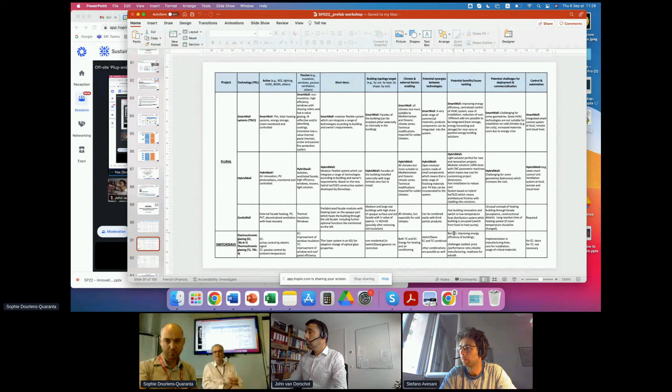Another thing quite important to learn: in Switch2Save, almost in any of the projects we have claimed costs and manufacturing change areas—we have CPAs—and it would be important to know, maybe not today but in the further course of the project, who can realize the best way to put prefabricated pieces on the floor so that somebody could bring this in. Maybe another project had good ideas with components, but the prefabrication and realization phase was not ideal for whatever reason. We should bring this together so that projects which solved this in the best way can pick up solutions from others, to widen the network beyond the project boundaries. That would be, I think, a benefit.

That's a very general view. Of course as a coordinator I cannot go into technical details, but bringing this together could be of good value. I think in the Step Up project we had a good example of how this could be industrialized. My opinion is that at the moment this value chain is not yet developed. We have companies producing, for instance, passive opaque prefabricated systems—they have the logistics, they have the know-how of how to install them on site, but in their manufacturing process they do not have the know-how to integrate the transparent parts, whether it's of value to integrate it off-site, especially for the transparent part, or on-site. What are the limitations in the transportation, in the logistics of transporting transparent and opaque at the same time, pre-integrated? And of course the business model is missing, because companies producing prefabricated opaque systems have their own know-how, and other companies producing IGUs have theirs. At the moment there is no interlinking and integrating model. So I think there is still room to develop further the value chain and the business model.

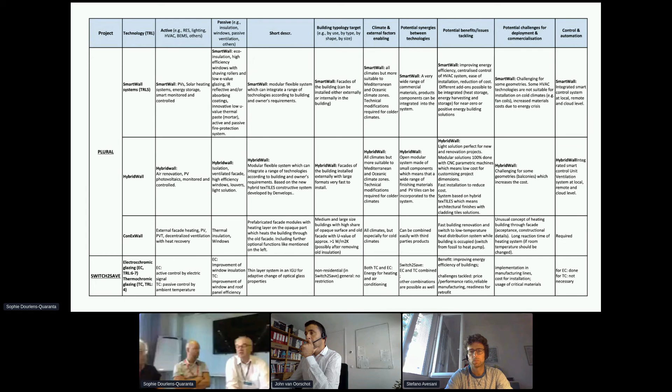Okay, would you like to say something? Yeah, I would add something. For me, it strikes the question of how we can interest an integrator from the economic point of view. Most of the projects, and I think all of them, have some demonstrators which are real buildings, but they are unique buildings.

And I know from the Switch2Save project that in order to build the IGUs, we had to exchange very specific measures and make this fully customized to that special building. It would, in my feeling, be a big benefit to have an area where a certain type of building is repeated a couple of times. So in my part of Germany, for instance, there's a certain type of school which all look the same way, and meanwhile they are all renovated, or more than 40 years old. But anyway, there was one type of building. If you have such a school, and you have some facade element, then you have a thousand other schools you can apply the same to.

And even if this is not part of the project, a potential integrator to bring IGUs and facade elements together would give us another level of interest in this project, because we see the business case. That's, I think, an add-on to the situation where I have a unique building and I know the next building will be completely different.

So if I understand well, from the economic and business point of view, this type of integrated prefabricated solution, whether transparent or opaque, has interest only for large complexes and repeated characteristics of buildings. Maybe in the next stage, once people have some experience and understanding of how complex a change of size or shape is, it will be different at a certain point. But for a first or next step, it would be a benefit to have a renovation where these adaptations are as small as possible.

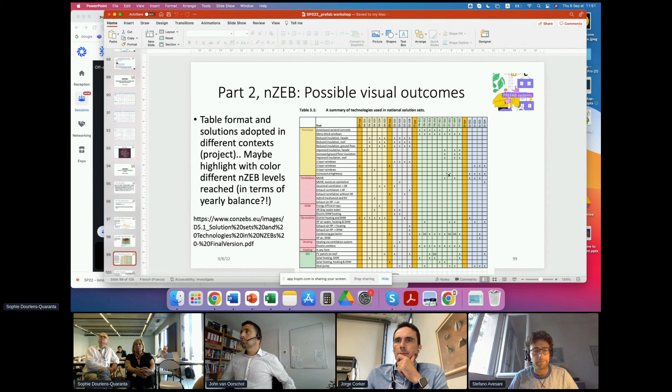I was also suggesting that we might use colors to explain the kind of impact in terms of overall NZEB balance. The next slide is another more specific, but still table-wise representation.

Let's move to the other two typologies of possible visual representation, more technology related. This probably applies, for example, to the smart window component scale, where we could group - as this paper reports - visible transmittance against G value, mapping how different technologies could perform. The same is for the last inspiring graph. The next slide is about cost and efficiency of photovoltaics.

So just to close, shall we now have probably 10, 15 minutes, I don't know Maria, just brainstorming on the following questions that I reported in the last slide.

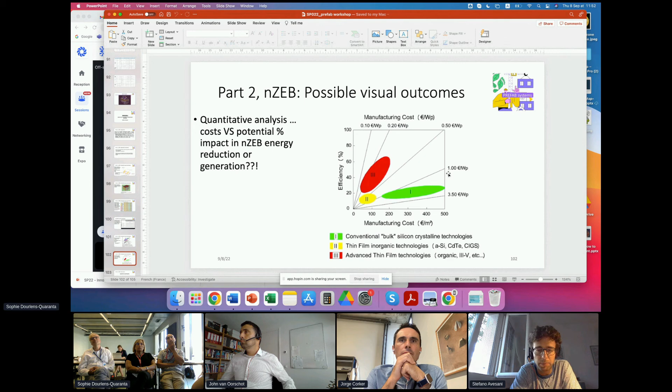So in your project, how do you evaluate your solution's impact in this NZEB vision? Which KPIs and at which scale - component scale, I guess, for smart glazing, or at building scale, which KPIs and which methodology? Some projects are already advanced or close to closure, so they might share their methodology and see how far this is already applicable, or maybe offline we could try to standardize that in a datasheet way, a table way, or a graph way, just to really have these goals. That is the challenge, and I let you start the discussion.

I hope that was clear. Thank you very much indeed, Stefano. You presented very clearly the vision that we have as a result of this workshop.

We will continue to work after the end of the workshop, and we will enhance the interaction with the rest of all the projects in order to try to achieve the goals. Now the questions are very clear. I think the first question is, how do you evaluate the impact of your technological developments in reaching the NZEB status, if I understand well?